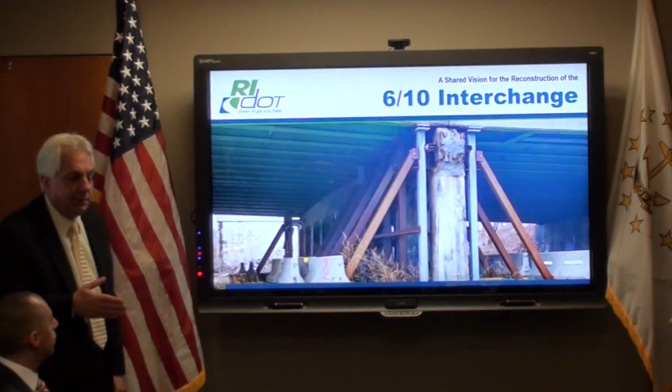First, I'd like to thank the governor and the mayor for the leadership that they exercised here in directing both the city's departments and DOT to this solution. Without that kind of strong leadership, this kind of solution doesn't just happen.

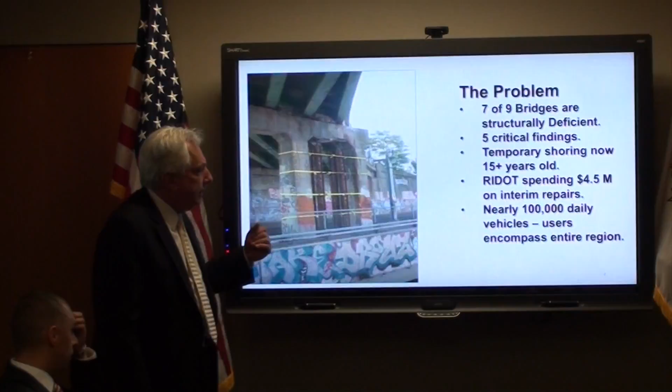I'm going to bring you through a couple of the reasons, of course, that we're all here, and you're all familiar with them. We've all been there. For the last 30 years, this has been a problem that has been plaguing both the city of Providence and the state of Rhode Island.

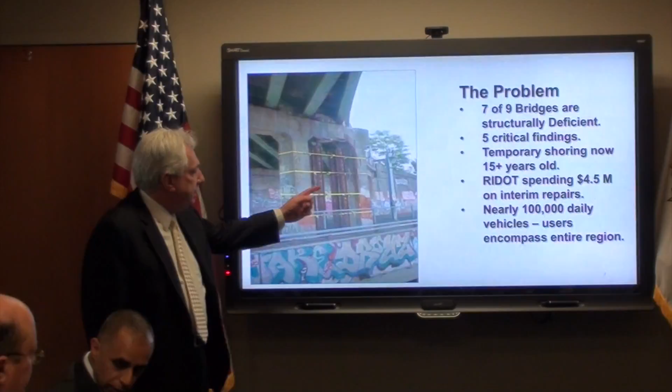There are 9 bridges in this complex of this interchange. 7 of them are structurally deficient. During the last year, as you know, we had 5 critical findings. Those were structural findings of critical problems. This is a picture of one where one of the temporary braces that was over 15 years old was deteriorated to the point where it was about to collapse onto the northeast corridor.

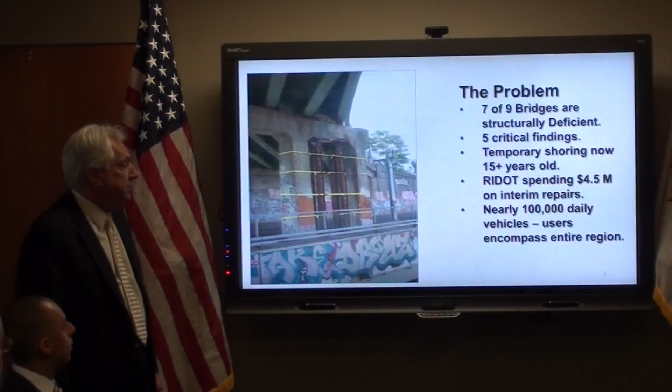The temporary shoring, as I said, is 15 years old. And the state has been having to spend on the order of $4.5 million a year just to keep it in a safe condition.

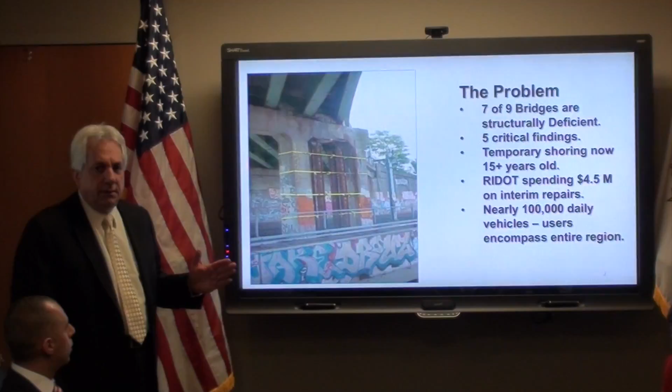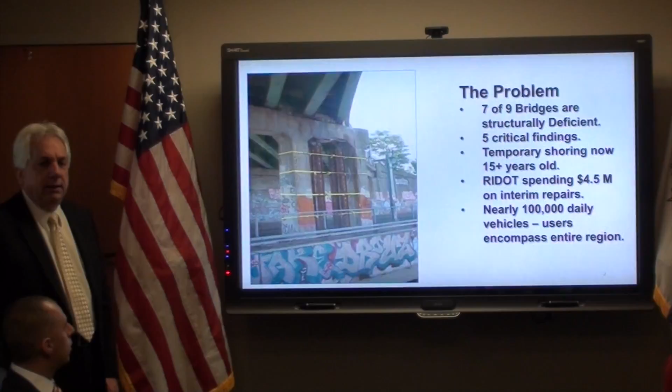All of that coupled with the fact that on a regional basis, 100,000 trips per day go over this interchange. That encompasses a wide region.

So the good news is that this will be able to be repaired as a result of the work that the governor and the legislature did last year in providing $400 million of funding that is ready now for us to begin to spend on this project as a result of the RhodeWorks legislation.

I'm going to go over a few of the regional transportation and infrastructure improvements that we're going to make, and then I'm going to turn it over to Bonnie Nickerson to talk about some of the improvements that we've collaborated on making for the city of Providence.

First of all, the complex here of interchanges and overpasses and entrance and exit ramps creates a certain set of conditions. The existing highway is built on 3 different layers. The top layer is the expressway that runs north-south on Route 10, and is the southerly direction of Route 10.

The next layer are 2 bridges on Westminster and Broadway that connect the West Broadway area with the Olneyville neighborhood. And then at the lower level are the lanes that carry the Route 10 traffic from Cranston into Providence in a northerly direction.

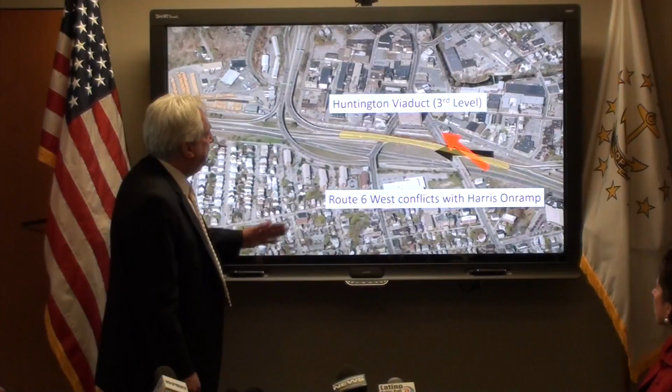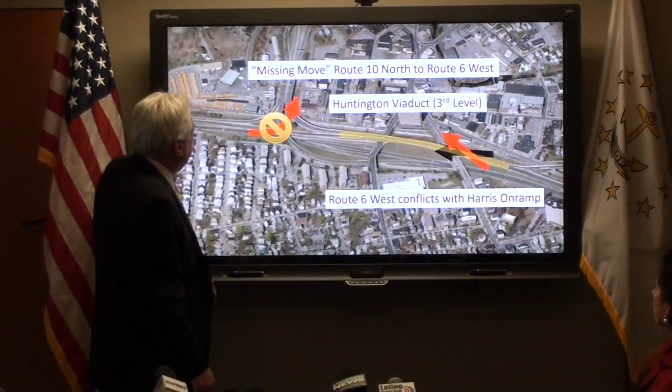In addition to that traffic problem, there is a missing link that the mayor referred to and the governor referred to that never got built, that takes people from the Cranston area heading north on Route 10 to Route 6. Today, people have to get off the freeway, go through city streets, either through Olneyville or other city roads, to get back on to Route 6 west.

So those are the 3 major conditions that, from a transportation standpoint, we're looking to solve while maintaining the regional significance of this project and getting 100,000 vehicles per day where they have to go.

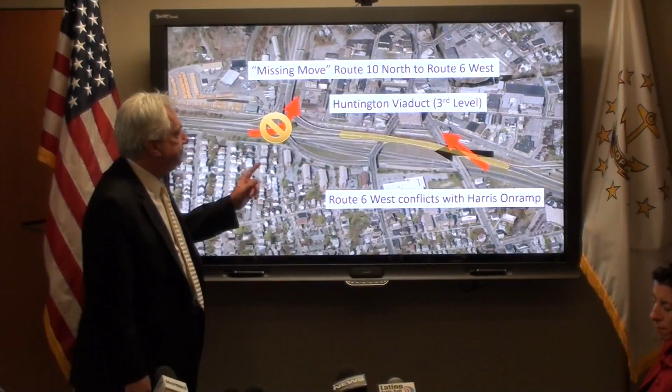Next. The solution is the plan that you see here.

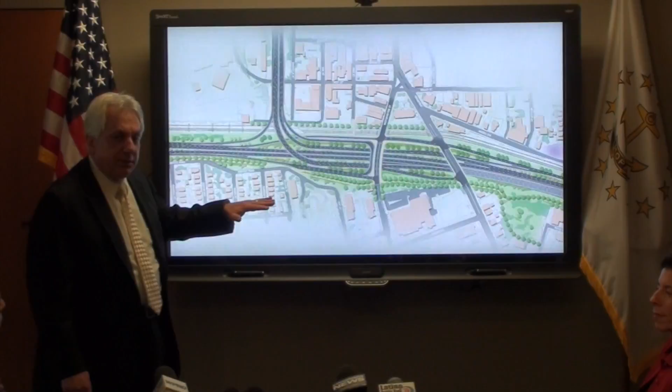We've lowered the elevation of the entire infrastructure so that the north to south and the south to north links on Route 10 are all at grade down at a lower level. And the second level still exists on Broadway and Westminster Street.

Next. We've created the link in this design that allows for the westward move that the governor referred to. We've done it in a way that's very efficient.

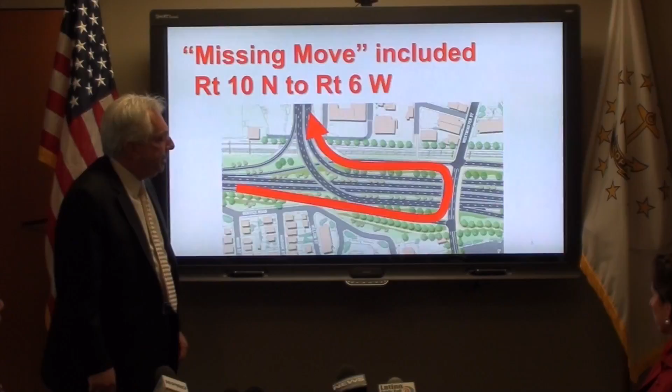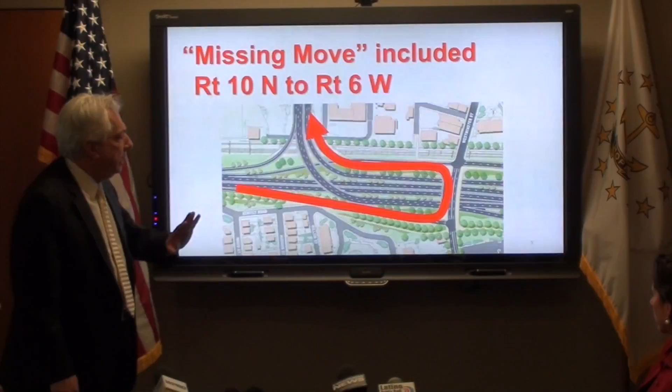Our engineers worked on a plan to incorporate the westward move into the reconstruction of the Westminster Street Bridge. So we accomplished two missions with the same bridge reconstruction, which would have had to be reconstructed anyway. And it's all done on dedicated lanes with no stoplights and without having to enter onto the city grid.

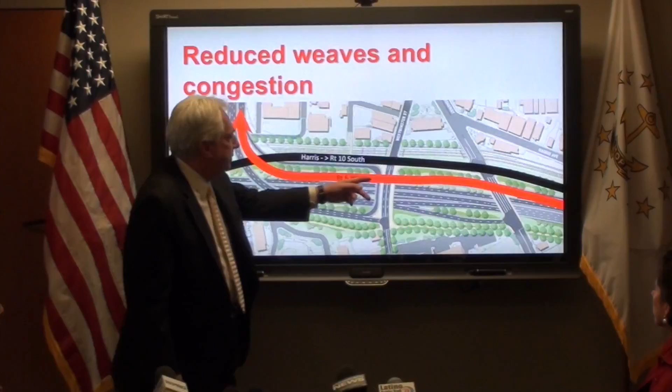Next. In addition to that, we've created two separate lanes of travel on the Route 10 south direction. One set of lanes will bring you on dedicated lanes onto Route 6 west, and another set of lanes will take you onto Route 10 south, so that the weaving and congestion associated with those weaves will be eliminated. Next.

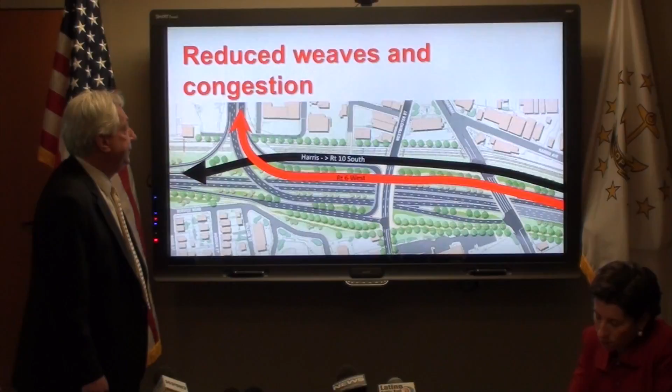In addition to that, we spoke of the visual barrier between West Broadway and the Olneyville area. That condition exists both here on the Westminster Street Bridge and also on the one on Broadway, where this high level, this third level of infrastructure that I was talking about, that under the new plan will be eliminated. So everything will be built down on grade underneath this Westminster Street Bridge that you see in front of you here.

It'll open up the vistas and the visual connection between the two communities. When it's completed, it'll incorporate new pedestrian features, new bike features, and a dedicated separate lane. On the other side of this barrier are the dedicated lanes that make the westward move possible without entering onto city streets.

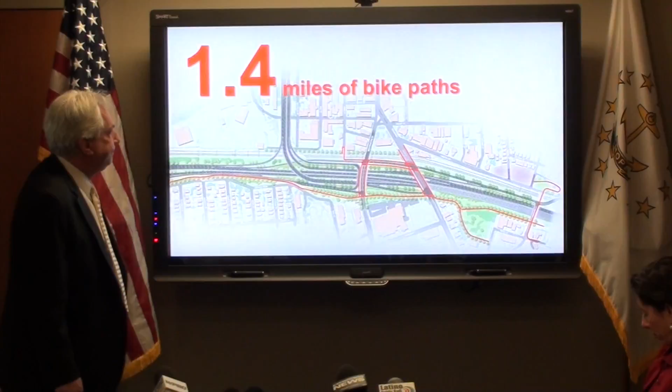We're going to turn it over to Bonnie Nickerson now to talk about some of the features that we added to this design to accomplish some of what the city of Providence was looking to accomplish. Thanks, Director. So, as the Director said, about over a mile, 1.4 miles of new bike paths will be part of this project. These are off-road dedicated bike paths that link two regional bike networks together.

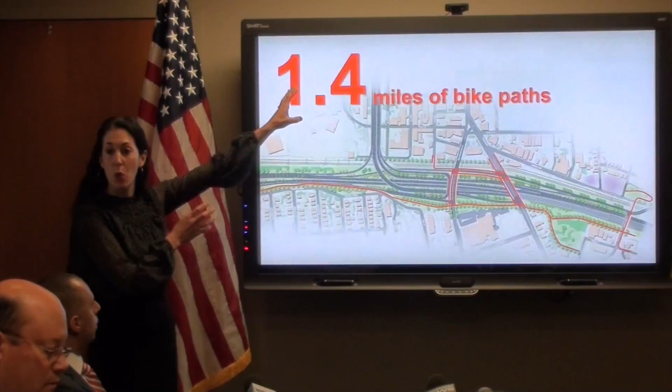As we know, the Washington Secondary Path is just to the south and west of here, and the Woonasquatucket River Greenway is just to the north and west of this location. So Olneyville Square has always been sort of a donut hole in the regional bike network. This project really fixes that. So these red lines on the plan indicate where those new bike connections are.

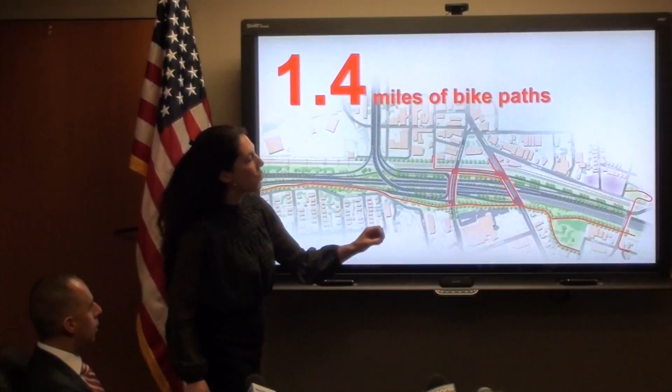As you can see, a dedicated bike path runs along the edge of the highway, but also crosses at Westminster, at Broadway, continues north, and then crosses at Tobey Street. So there's a new cross-neighborhood connection at Tobey Street. We'll talk about that in just a minute.

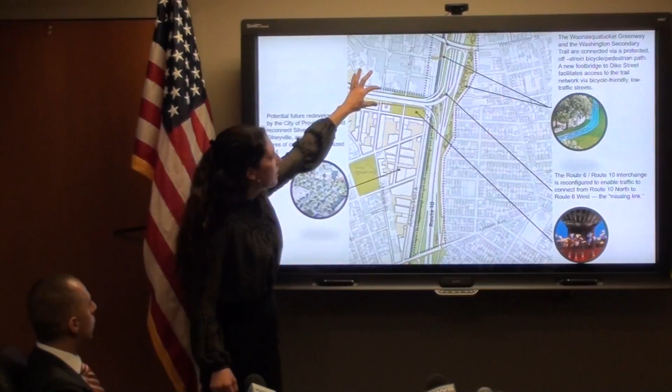This is an existing connection at Troy Street, and at Agnes Street, the project will be built to not preclude that city street from being built in the future. This is private land on either side of that street, but our future redevelopment plan calls for connecting Agnes Street through, so we'll have 2 new connections from Silver Lake into Olneyville Square.

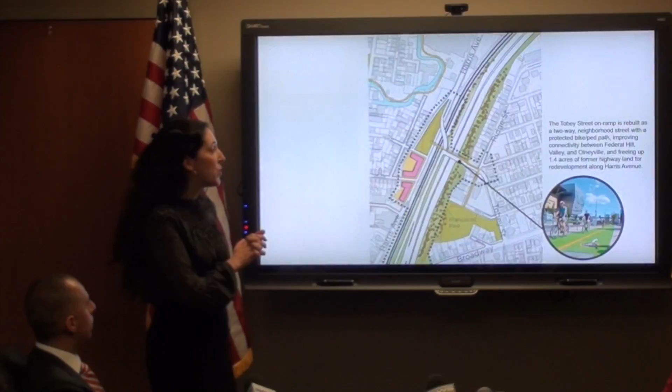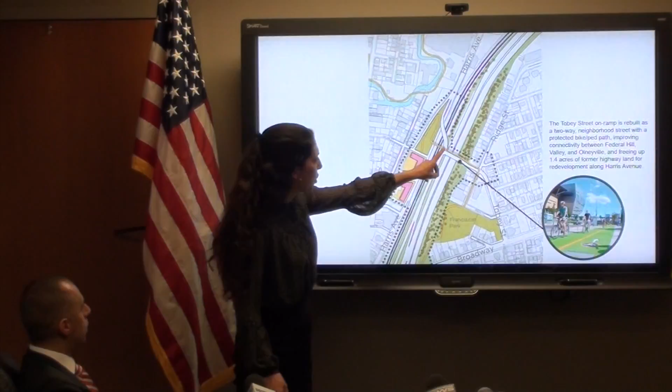This is one of the most exciting parts of the plan from the city's point of view, which is really reopening what is now the Tobey Street on-ramp to be a true neighborhood scaled city street. So cars will be able to access from Federal Hill to the Harris Avenue area. This is a 2-way city street, but it also provides access to the highway. As you're crossing over Tobey Street, you'll be able to turn and head onto the highway, or turn right and head onto Harris Avenue.

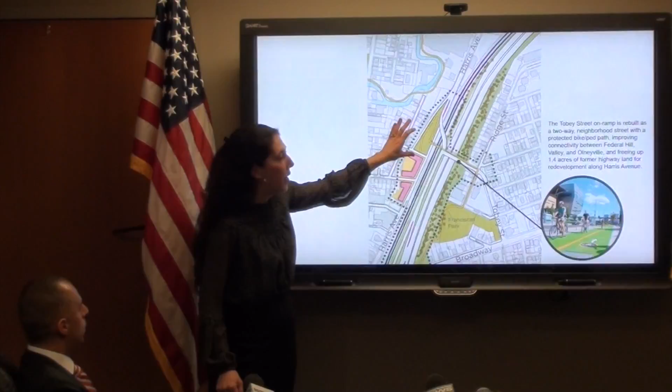The other important part about this is it creates a dedicated bike and pedestrian crossing at Tobey Street, which ends into a new green space on the other side of the highway. This yellow line here indicates how bikes and pedestrians will cross this new connection.

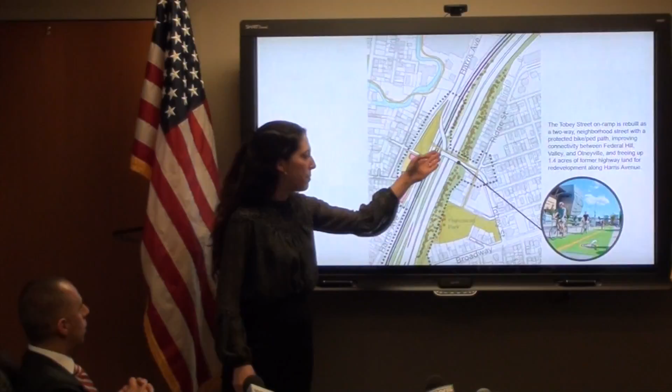So when we talked about some of the goals for this project, connecting neighborhoods was really number 1, and we're really excited about this new connection from Federal Hill to the Harris Avenue area. The other thing worth noting here is Tobey Street today, through the Federal Hill neighborhood, functions as a highway on-ramp. With the redesign of this project, we can return Tobey Street into a true neighborhood street, and that's really exciting for us as well.

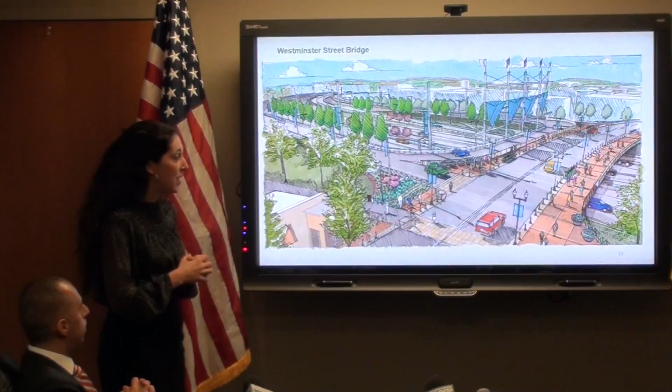And I think we are ending here on this rendering. As the director said, the visual impact of the highway through this project is going to be significantly reduced, and I don't think we can overemphasize that. It's a significant benefit to the city, to the neighborhoods, and to connect these communities. Thank you. Thank you, Bonnie.